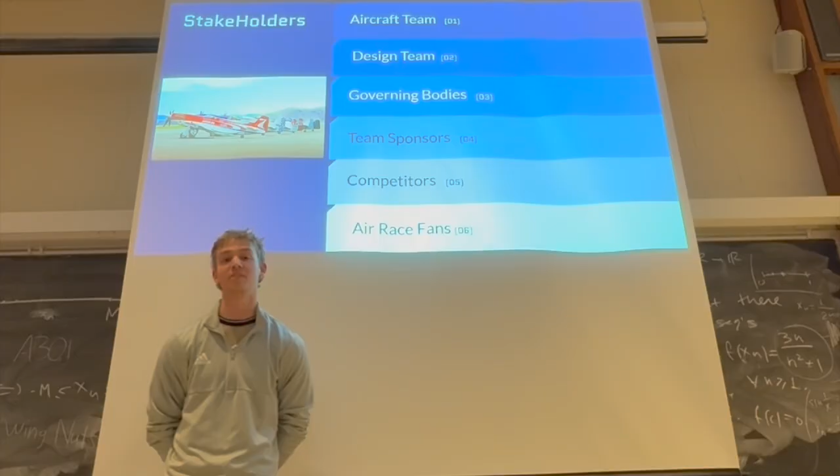Next, we have our competitors, who are the aircraft that we'll be flying against, and the pilots, who are concerned over safety as well as a fair competition. And then finally, we have our air race fans.

For the design requirements, we went over a few basic steps here to decide what the needs of our stakeholders were and then the requirements needed to fill each of those needs. To start, we have certification and inspection, which includes passing with the FAA, the FIA, and the National Championship air race officials themselves. And that's in order to have a safe aircraft that can compete in the competition safely, as well as legally.

Then we have our traditional flight capabilities, which is the ability to take off and land at a traditional runway. In this case, we used an airfield with a 10,000-foot runway, clean conditions, and an elevation of 3,500 feet to be representative of the airport that we will be taking part of for our aircraft flying in race days. Then we have our successful race completion. In this case, we are looking to complete the air circuit in a competitive time to give us the best advantage to win.

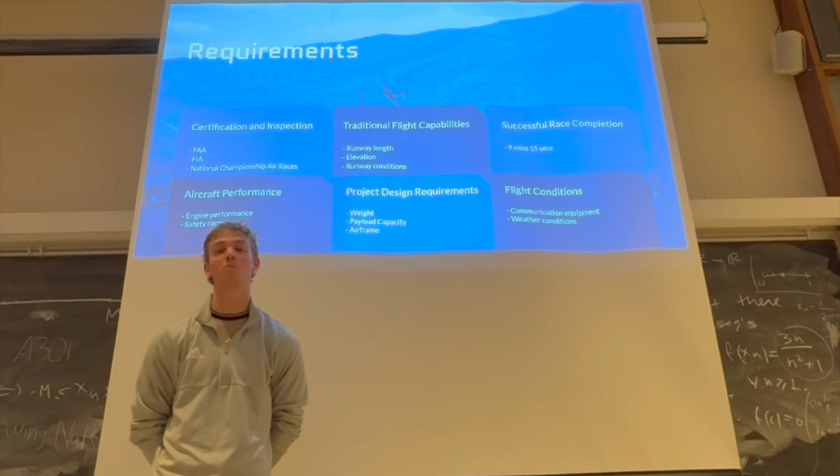Then we have our aircraft performance, which includes engine performance as well as aerodynamic characteristics and safety margins in order for our aircraft to not only be successful and compete, but also to be safe. We then have project design requirements, which include things like the number of engines, the payload, and the airframe itself, and how those need to be designed to fulfill project requirements in themselves. And then finally, we have the flight conditions that our aircraft needs to be capable of flying in, such as different weather and wind conditions that the aircraft can face.

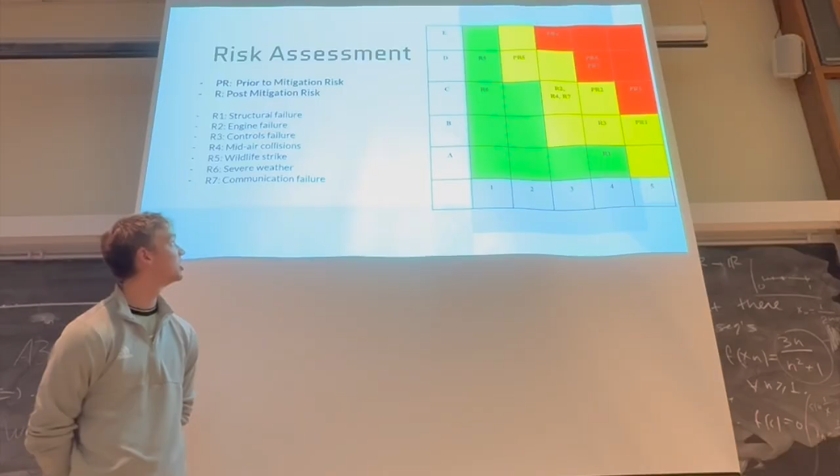Next, we began by looking at a preliminary risk assessment for our aircraft. If we look up here, you can see that there is a table that includes both post and pre-mitigation for the risks. And post-mitigation, most of the risks are in the green, but we can still see that there are some in the yellow. This points out the fact that the aircraft mission in itself is very dangerous, as all air racing will be.

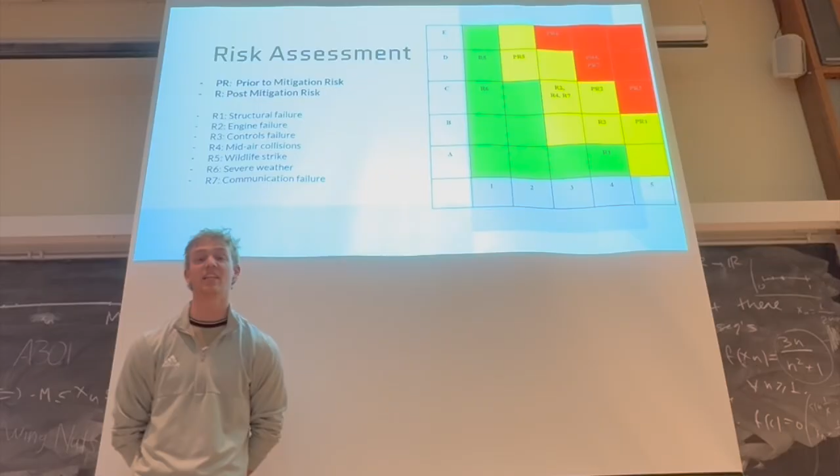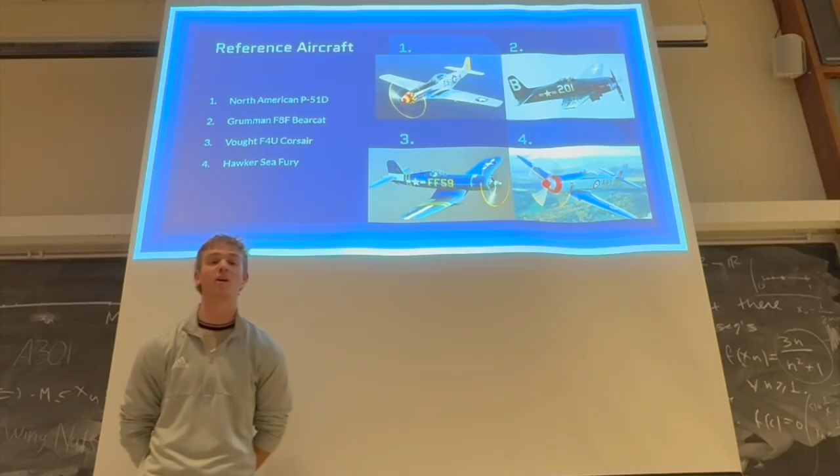Next, to begin our design, we began by looking at the reference aircraft. Four most prominent racers that also have a lot of available data include the North American P-51D Mustang, the Grumman F8F Bearcat, the Vought F4U Corsair, and the Hawker Sea Fury, all of which have histories of success in the unlimited class of the National Championship air races.

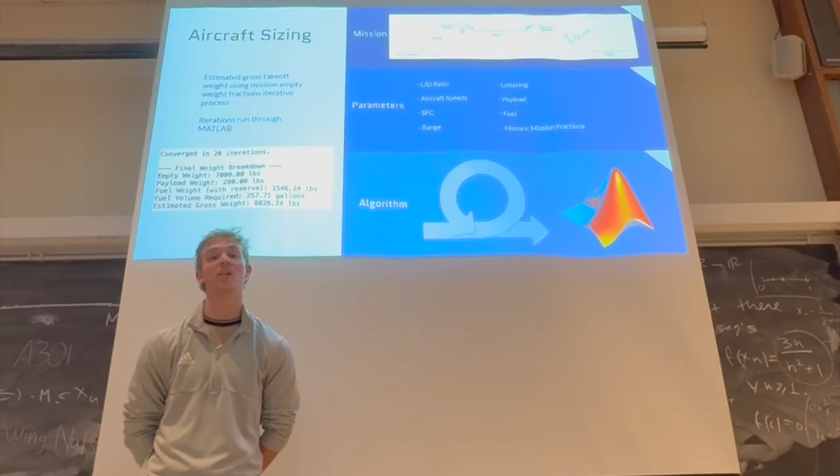The actual beginning of the aircraft design starts with an assessment of the initial gross takeoff weight of our aircraft, and we did this by using the sizing algorithm that we've used throughout A301 class. In this case, we ran this code through MATLAB and ended up with a final result that is around 8,800 pounds for our initial gross takeoff weight for our aircraft.

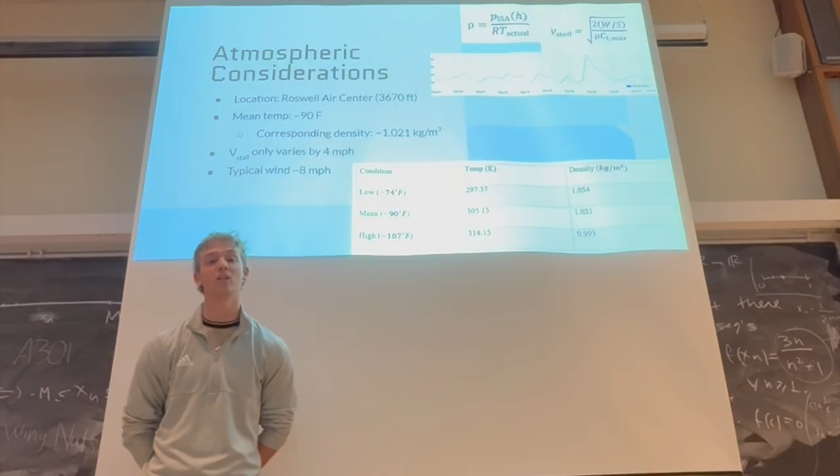After looking at the aircraft's initial gross takeoff weight, we then looked at atmospheric considerations. In this case, we're looking at the typical conditions around the Roswell Air Center, which is the airport that the race will be taking place at. Here we can see, looking at the slide, that the average temperature is around 90 degrees, which is slightly above average for standard temperature, but the density is well within a considerably normal range, as well as having relatively calm winds, all of which are very advantageous for flying.

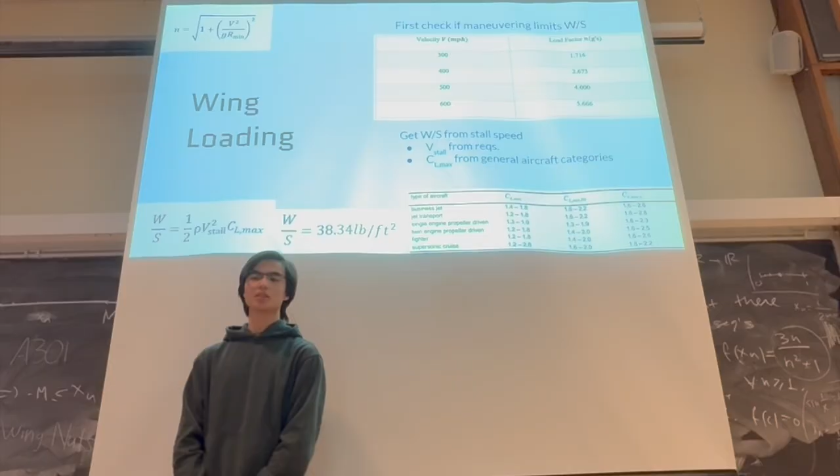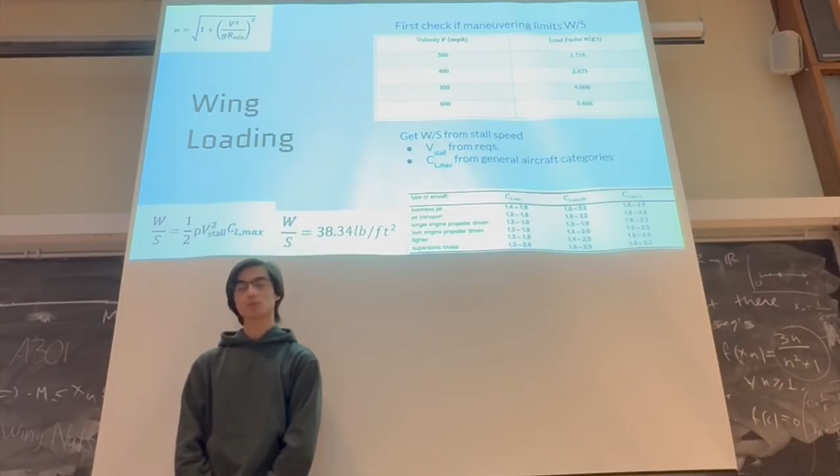To get our wing loading thus, we plugged in our stall speed target, which was 100 miles an hour, to this equation, which resulted in a wing loading of about 38 pounds per square foot. To carry on from that, we have the wing geometry. Start off in the upper right, we have the wing area, which is a direct next step from wing loading and getting the weight of the aircraft. And that turned out to be about 230 square feet.

Now we have the aspect ratio, which came out to be about 5.9. This was taken pretty directly from some of our reference aircraft, in particular the P-51. With SREF, we were easily able to get things like the wingspan, chord, and other information.

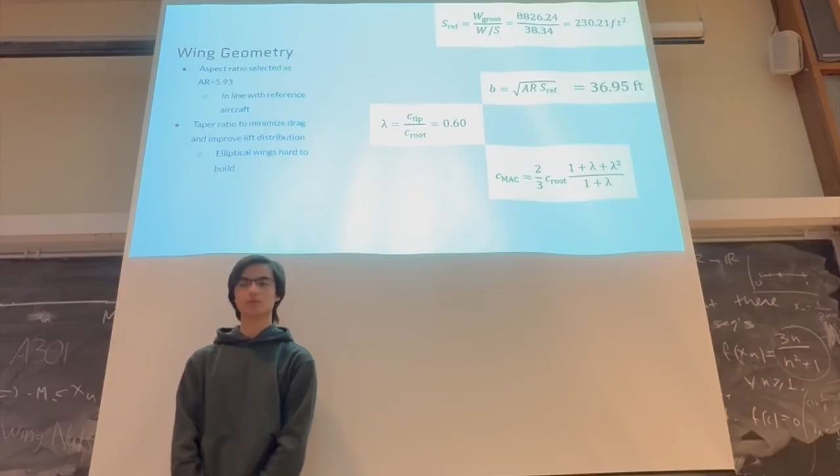Finally, we have the airfoil of the wing. So to do this, we had to get Oswald's efficiency, and that came from this equation of empirical correlation for Raymer in the upper right, where we essentially plugged in our aspect ratio and got a pretty clean 0.87. We plugged this into various plots. We looked at various plots from Nicolai, including these two, and eventually came to the NACA 6409, which is plotted in the lower left.

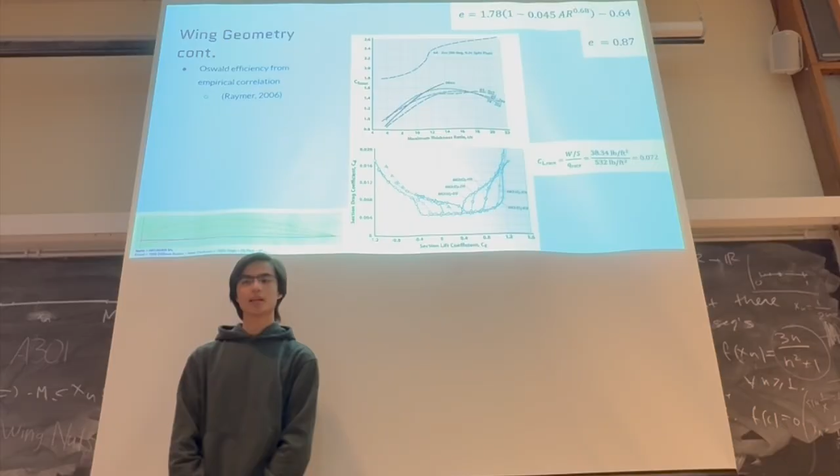To finish off the controllability and tail sizing, we also wanted to make sure that our pilot always had control of the aircraft. To do this, we applied the 15 to 35 pounds requirement on the stick, using these relations given by Etkin on the right. These relate pilot input to essentially gearing, and by looking at these relations, we could tell that we could achieve any type of power we wanted for the pilot based on a certain gear ratio.

In addition to purely relying on gear ratios, we also compared our calculated tail areas to various reference aircraft, and came out that given that our World War II warbirds could do these relatively high load maneuvers, so could we with a pretty similar tail area. Our tail airfoil is the NACA 0012, which is again plotted in the lower right.

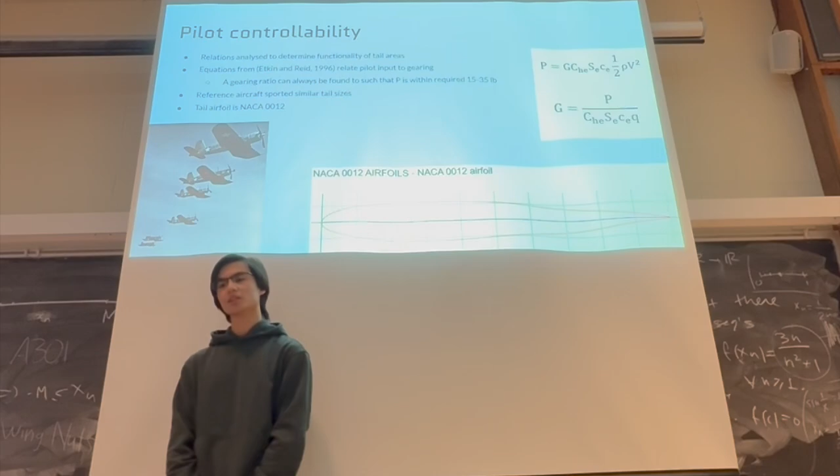Alright, so the next part of our aircraft sizing is finding our L/D ratio. To do that, we start with the drag coefficient. We basically just find the drag coefficient for any different components on our aircraft. That includes the wing and tail, fuselage, and canopy. And as you can see, we use the equations listed above on the slides, and we just add them together.

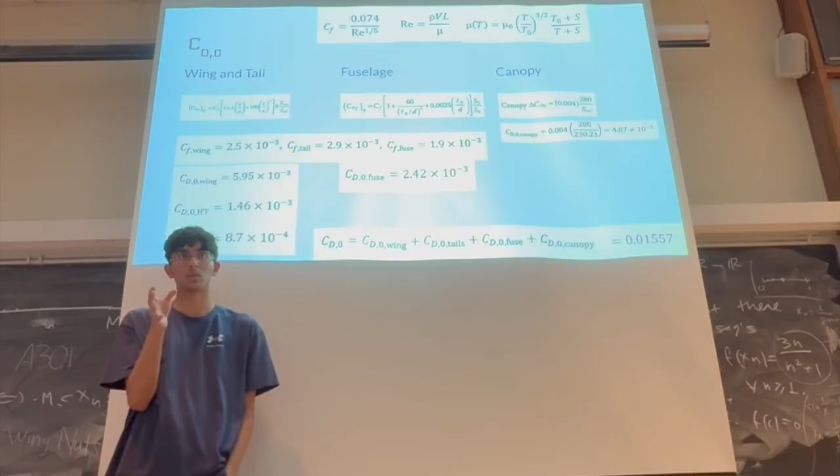Okay, using that, we can find our drag polar curve, which we can then use to find our optimal L/D ratio. And then from there, we can conduct some performance analysis on our aircraft. So first, we graph the drag coefficient versus our flight speed. And then from there, doing a bit more math, we can get our drag in pound force.

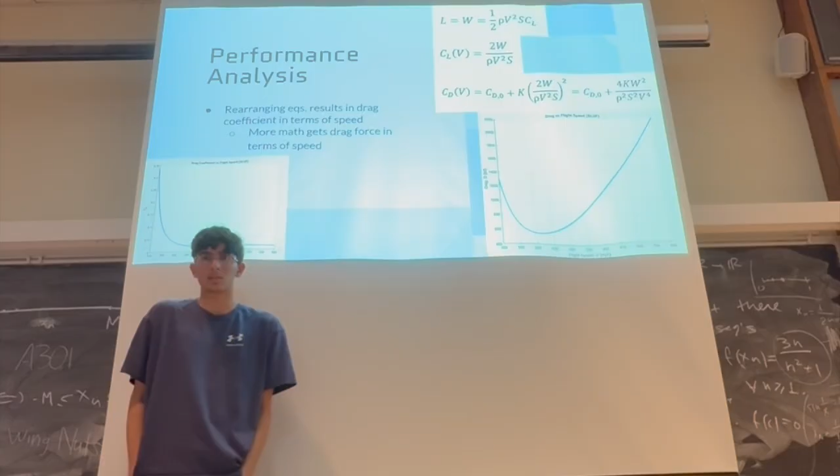Next, we can do a bit of performance analysis. First, we graphed our drag coefficient versus our flight speed. And then doing a bit more math from there, we can get our drag versus the flight speed. And the main thing here is that we want our cruise speed, which we know has to be less than 500 miles per hour, and we're looking more or less above 200. And we want the least amount of drag there, which you can see on the graph above.

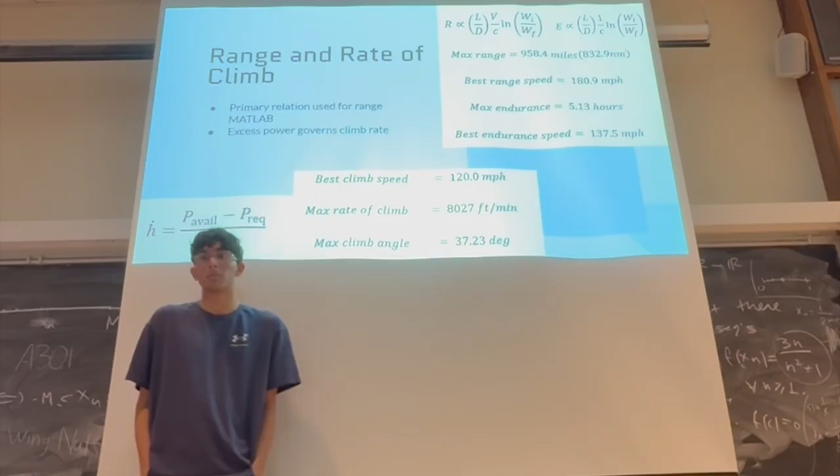And then from there, now that we know our optimal L/D ratio, we can use that in our range calculations and endurance calculations using the Breguet equations. Then we can also from there get our rate of climb, which we all do in MATLAB for our aircraft sizing. With those, we can find the max speed.

So we decided first on the engine, which is the Napier Sabre 7, which gives us 3,000 horsepower, which is a lot for our plane. And to find the max speed, you find where the power available is equal to the power required. And with this, we get around 500 miles per hour, a little less, but that's very competitive in this class of racing. So now you might be wondering how we got to all these calculations.

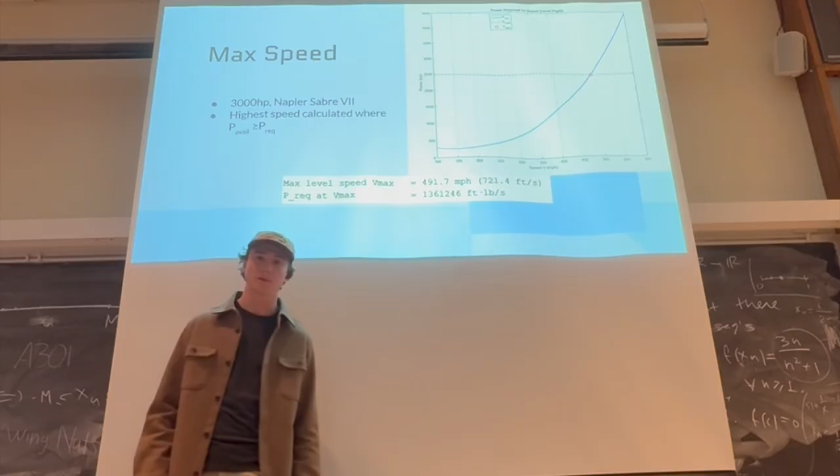So we'll go back a little bit to the first parts where we created the aircraft generation. So we created three concepts. First, it was a P-51 that was heavily modified to fit our criteria. The second design was much more theoretical. It was basically a completely new plane, very lightweight, a little less power, but it was still overall very good at design.

And then option 3 was kind of a mix of 1 and 2, so it was more standard, used a lot more of the P-51 body, but we used some of the new designs, such as a split tail wing. And so some of the key features we were looking for on this were unswept wing because we're below supersonic, retractable gears to reduce drag, and a single engine to maximize power while minimizing weight.

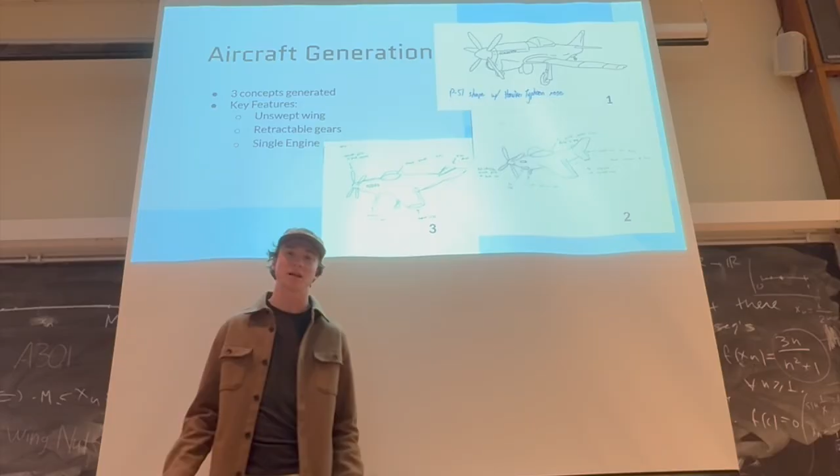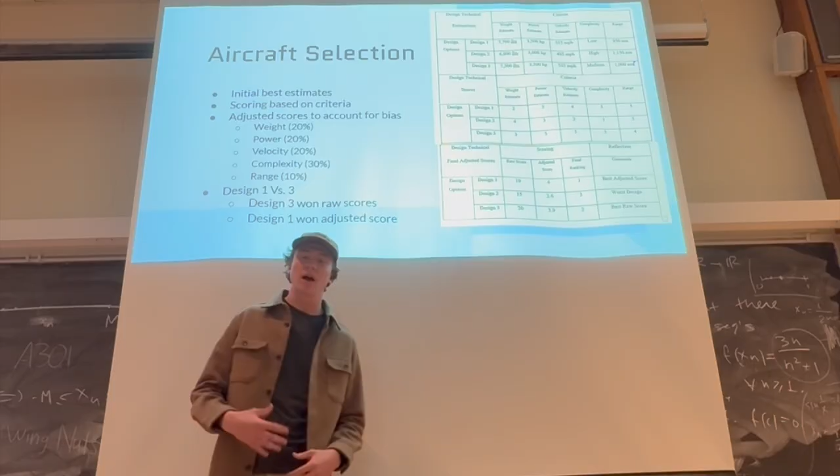Next, we have our aircraft selection. So we made a table to compare each of our criteria, which we based off of the requirements, to best estimates of what we thought each aircraft could achieve. So after this, we created a little bit of scoring based on the criteria, and then we weighted them. So the weights were based on what we found of our biases of what's most important. And so our criteria were weight, power, velocity, complexity, and range.

So we rated complexity a little higher because it's our first year. We want to prioritize safety because, of course, if you can't finish a race, you're not going to win. And we minimized range because range, although it's important, we don't need it as much in the race because the race isn't too long. And so in the end, design 1 and 3 were very close.

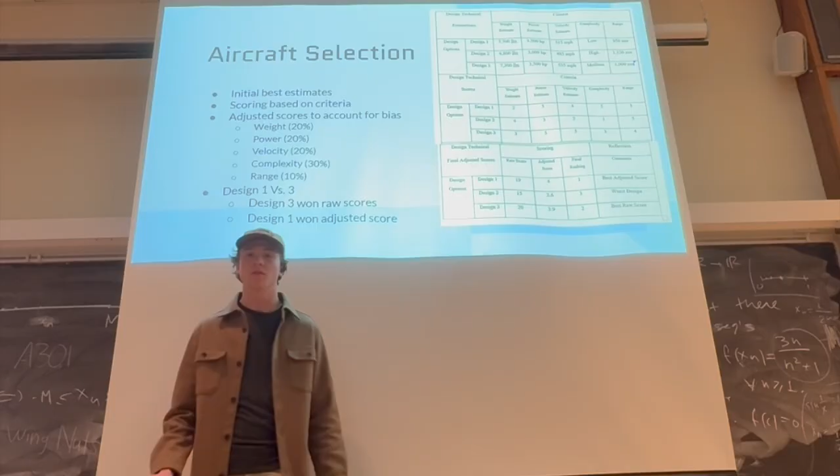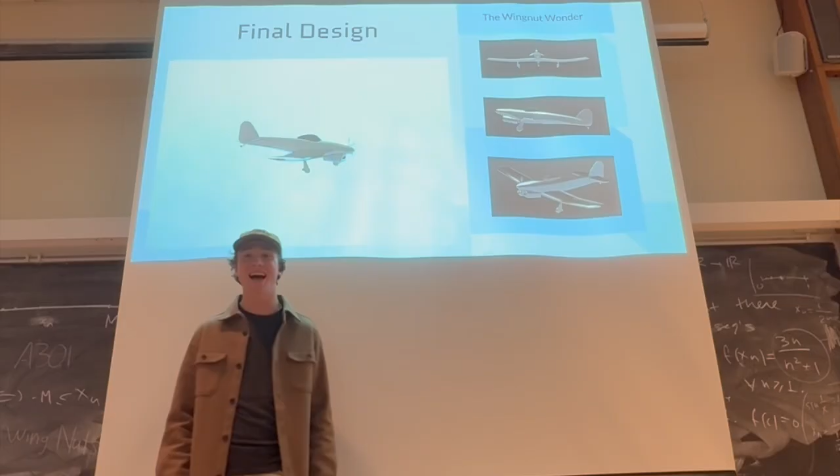So design 3 actually won in the raw scores. It had a better score overall for all the categories combined. But design 1 ended up having a better complexity score, and therefore put it ahead, and that became our main selection. So our final design, the Wingnut Wonder, as you can tell, very rough sketches, but it's a nice design that we will work on constructing to win this competition.